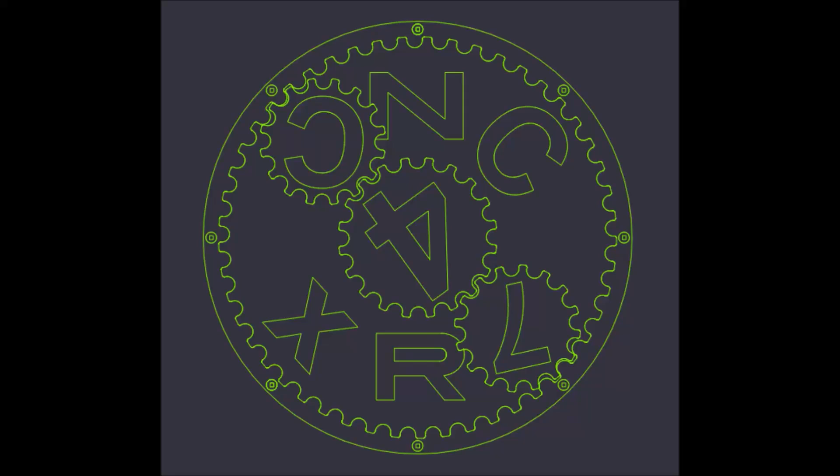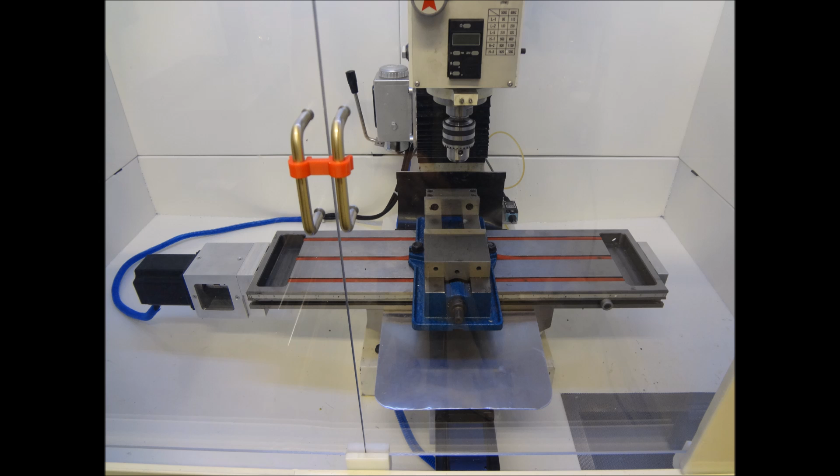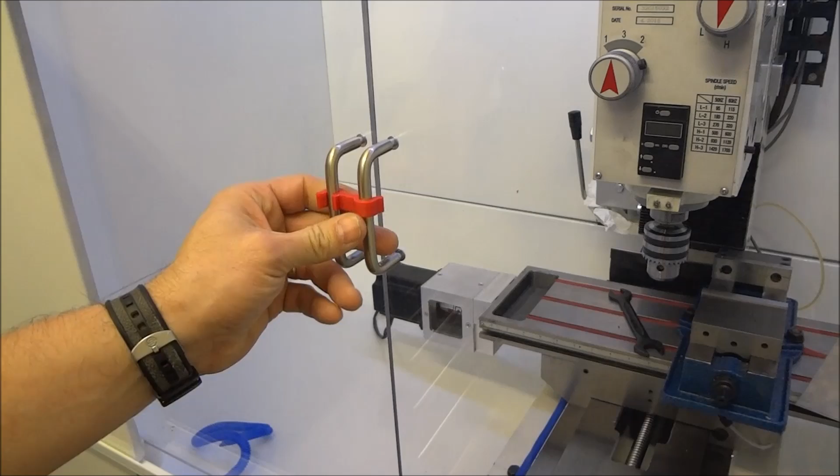In the last video we finished up the enclosure, and you may notice there's a little catch here, this little clip. I didn't know if I would need this, but the doors stay together pretty well, but I thought, why not go ahead and make a little catch just in case there's some vibration or anything, and the doors want to kind of separate.

So I just printed out this little catch. I printed several different designs. This one is one way and the other, and then I printed one that is both ways. I'm not sure which one's going to work out the best, but pretty nice.

They just kind of pop on, and then I can just open the door up, I don't have to worry about them. If I'm running a part, I don't have to worry about the doors wanting to pop open. I can just clip it like so, and that'll keep the door shut.

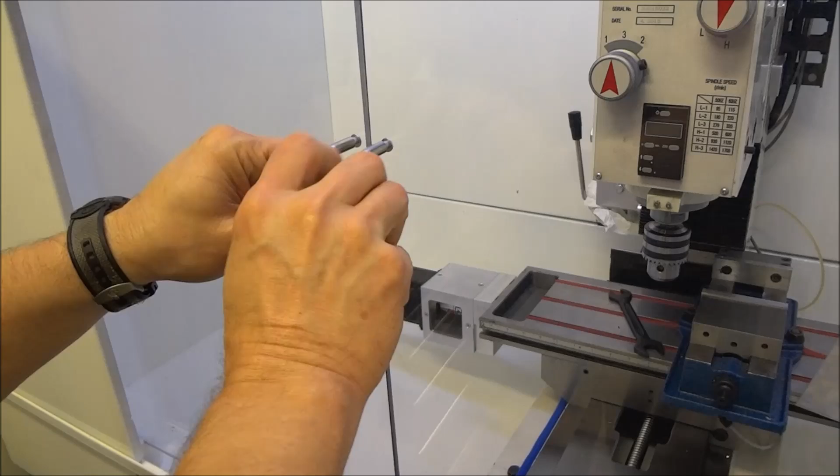3D printers are proving to come out pretty handy for a lot of different things. This just happens to be one. Now this is a pretty interesting little piece, and I learned a lot printing this out. So I'd like to share some of the stuff that I've learned with just printing out something as simple as a little clip. So let's take a look.

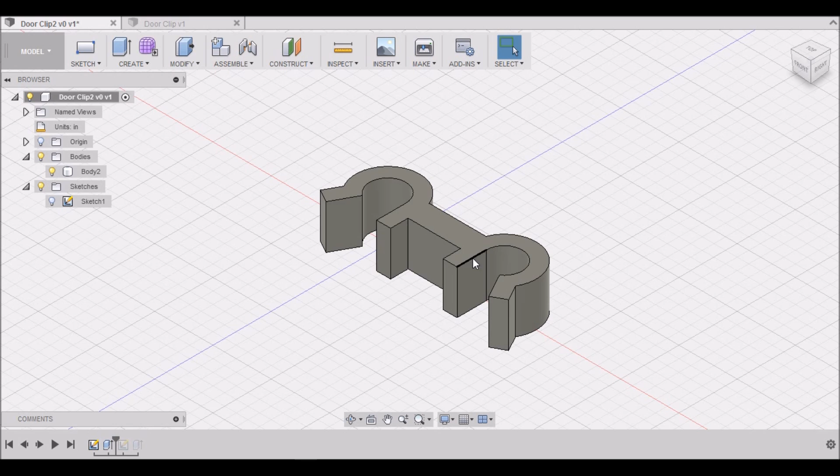Alright, well here we are in Fusion 360, and what I wanted to show you is just how to go about drawing up the clip. Now this is the clip, my last design, and originally I had modeled the clip so that it clipped in both directions. I think that this one's probably the one I'll use, it seems to work best.

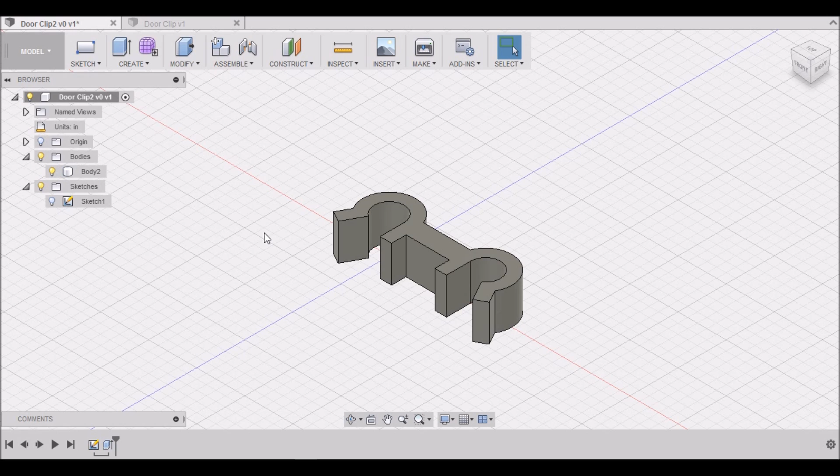As you can see, there's only a couple of different features here in the timeline. It's very simple to do. So let me show you how I went about modeling this clip. First, let me turn this stuff off, and we'll start another sketch right here. So first we want to create a sketch, I'm going to select this bottom plane here.

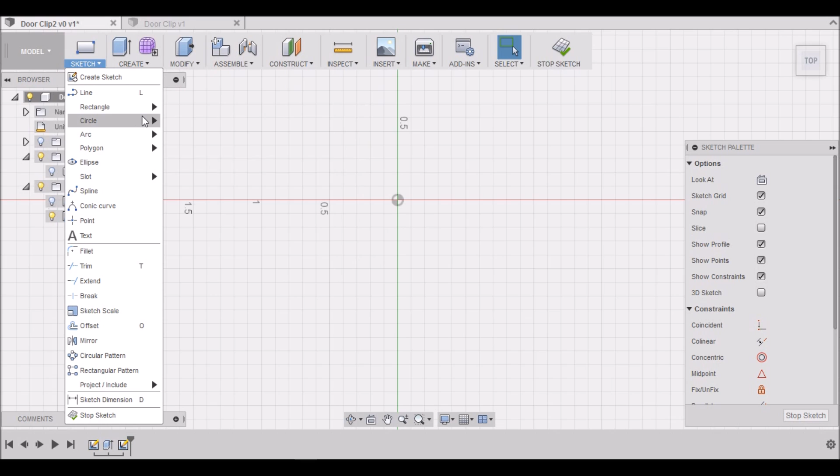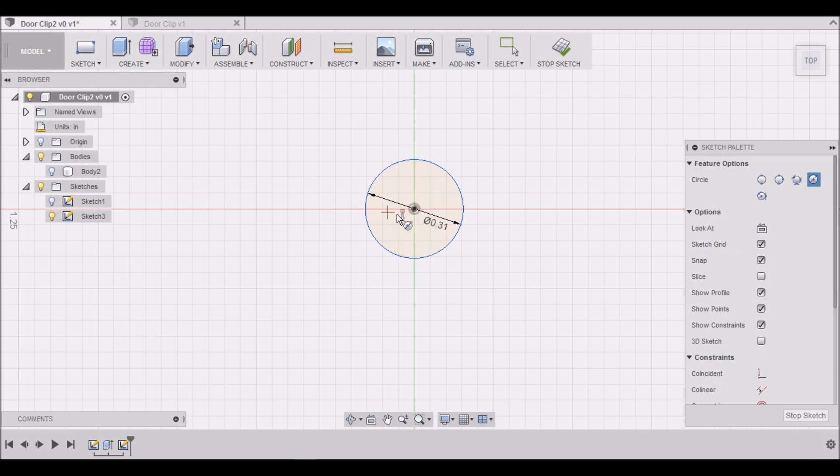Then I want to go to Sketch, Circle, and my handles happen to be about 0.31 diameter. So I'll draw my first hole at 0.31. Then I'll hit C once again to get circle, and we'll make it 0.6, about double the size.

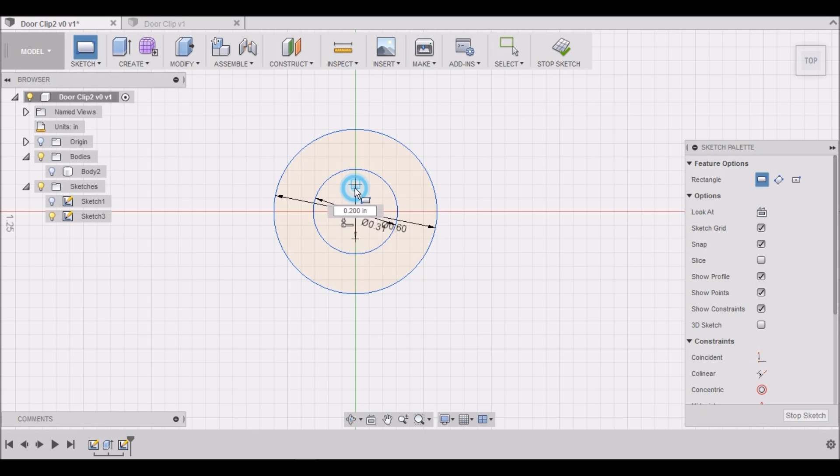There we go. Next we want to go to Sketch, Rectangle. And we'll go in this bottom box here, up to this one, and then drag it over a half inch. Reason being is the distance between my two handles, center on center, is 1 inch. So we're going to make this a half inch.

Next we're going to go 2-point rectangle. I'm going to select here, drag it down to here. I'm going to hit tab. I'm going to make this 0.188.

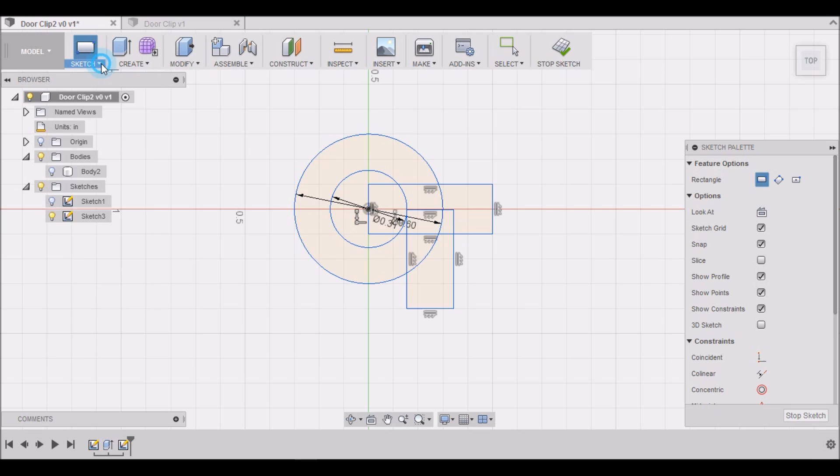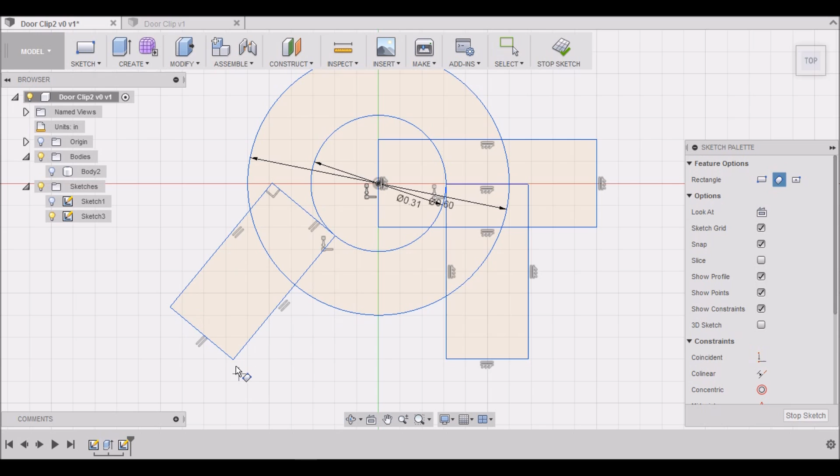Then we need to go to Sketch, Rectangle, 3-point rectangle. I'm going to grab right here on this circle and line to right here, we're going to type in 0.188. 0.188, click, and then drag down to about here so that it's even between here and here.

That looks good. Now I'm going to hit the letter T to trim, and then I'm going to just trim up what I don't need here.

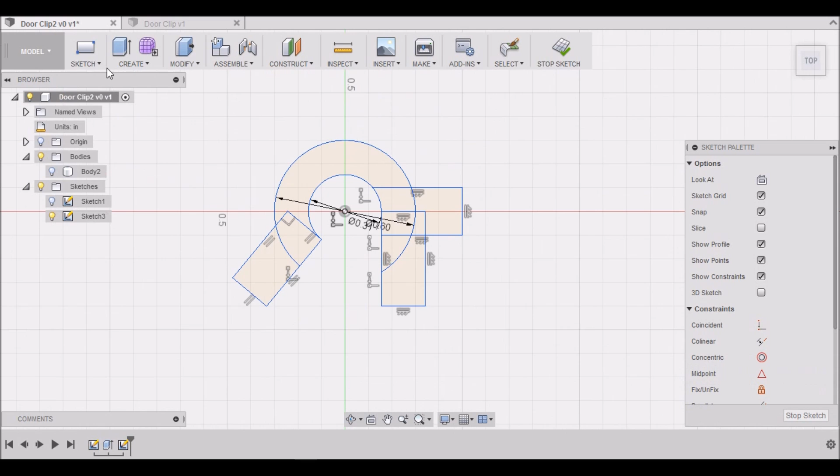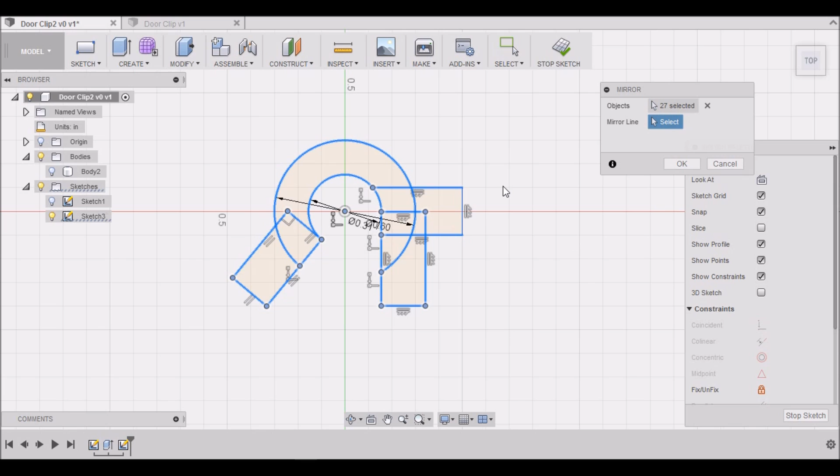Alright, I'll go to Sketch, Mirror. Left click and hold and drag across all of these. Hold Control, pick up this one and this one, and leave this one. Now I'll hit Mirror Line and then select this center line here, and it will mirror what we've already drawn.

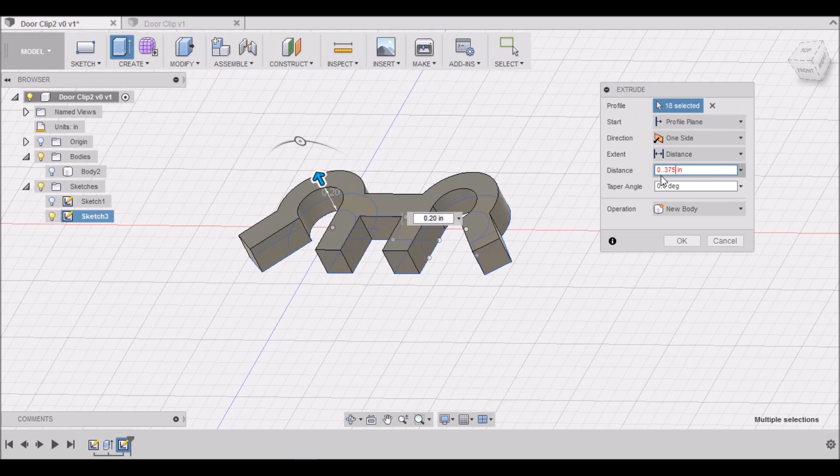Okay, left click, drag across everything to select it. Right click, press pull, and 0.375. I made mine about 3/8 of an inch tall. And there we have our clip.

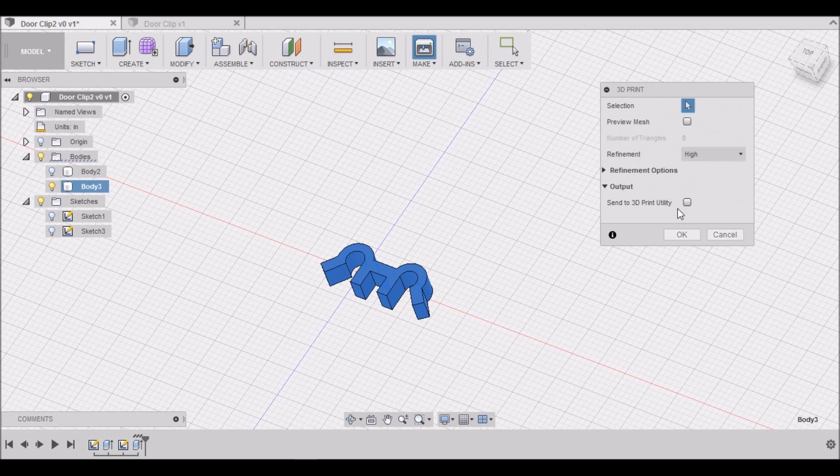Okay, now that you have your clip made, it's very simple to export this into an STL file. Go to Make, 3D Print. We want to select our model, and then make sure that Send to 3D Print utility is not checked. Click OK, and then save the file, whatever name you would like, in your favorite location, and that's all there is to it.

Now once we have our model made, we can import this into our 3D Print utility. I happen to use the one that came with the DaVinci Pro, XYZware for Pro. So let's take a look at that.

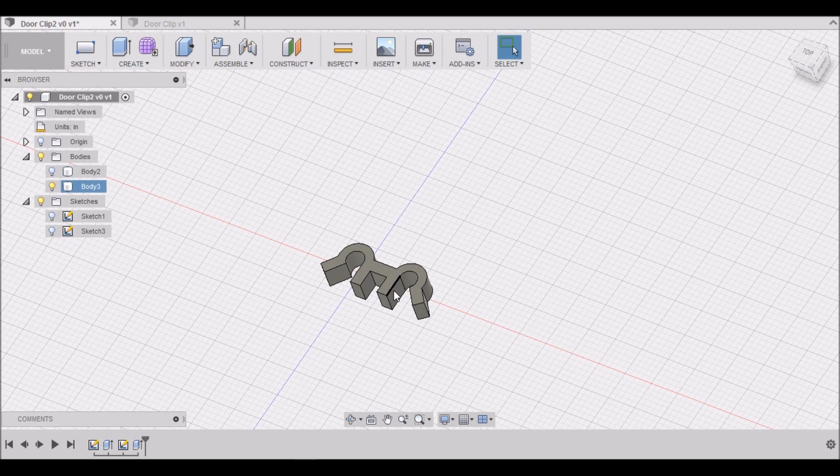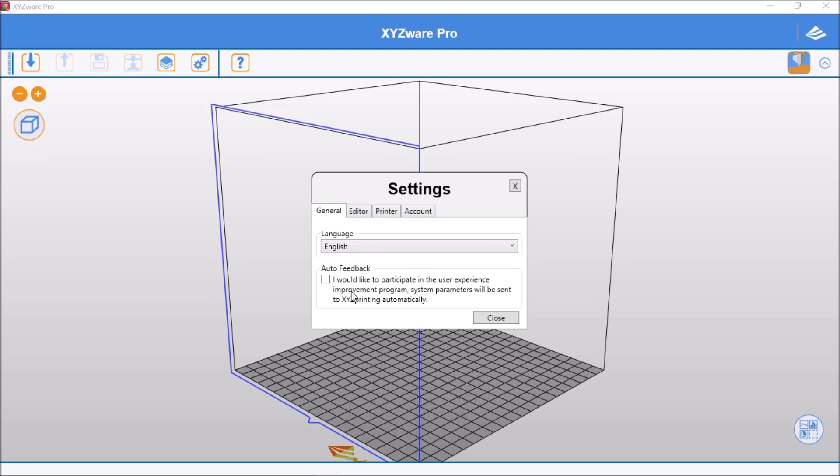Alright, so here we are in XYZware Pro, and there's really not a lot of stuff you need to do on here. We have our Settings tab, which is just general information, English, what display units you want to use, your printer. I happen to have Steel Blue inserted in the printer at the present time, and your account, that kind of information. I haven't used the object list.

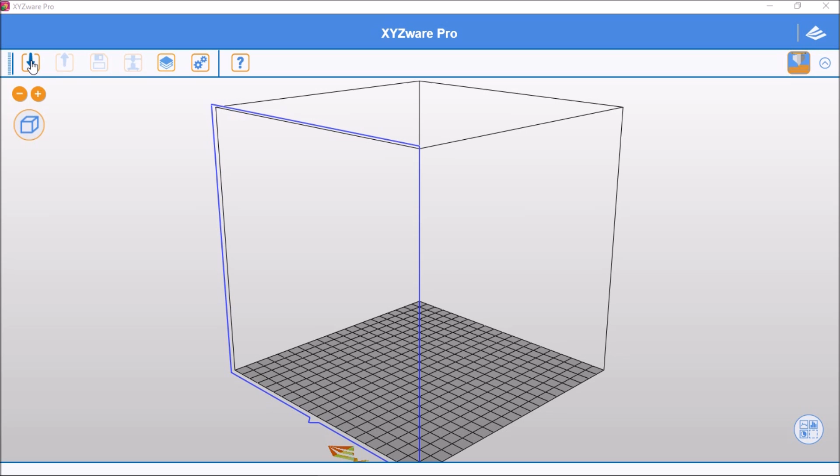This is the print button, the save button. This is the import and export button. So let's import the file we just created. We'll use our door clip.

And here it is. Now you can see that it's not oriented correctly, so we're going to select the model. Once it has this white box around it, you get these extra buttons. If I click away they go away, but once selected, you get these extra buttons to rotate it.

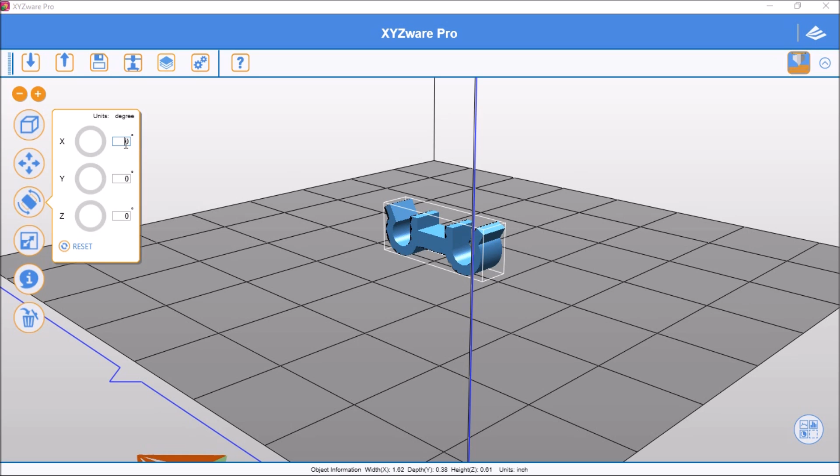Let's rotate it on the X axis 90 degrees. And then you also want to make sure that you land it so that it's up against the bottom there.

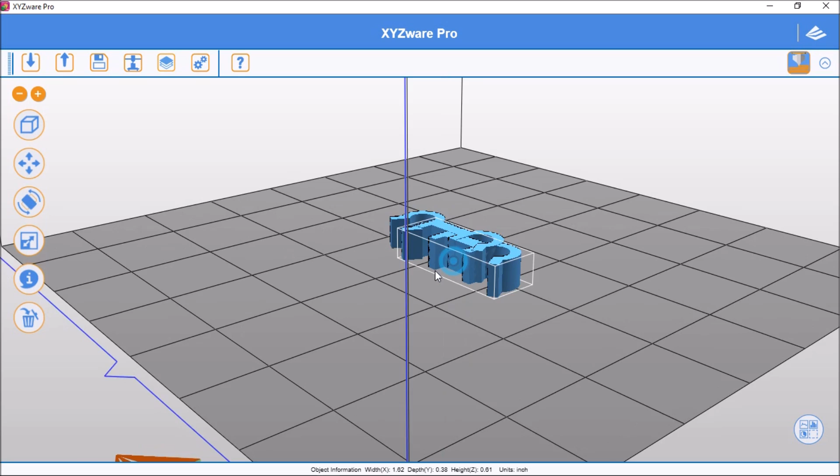Pretty easy. Now you can also right click on it and clone it, and after you have it cloned, you can print more than one at a time, which I like to do because these are pretty small. We can make sure that one's landed too. And there we have it, now we have two printed here.

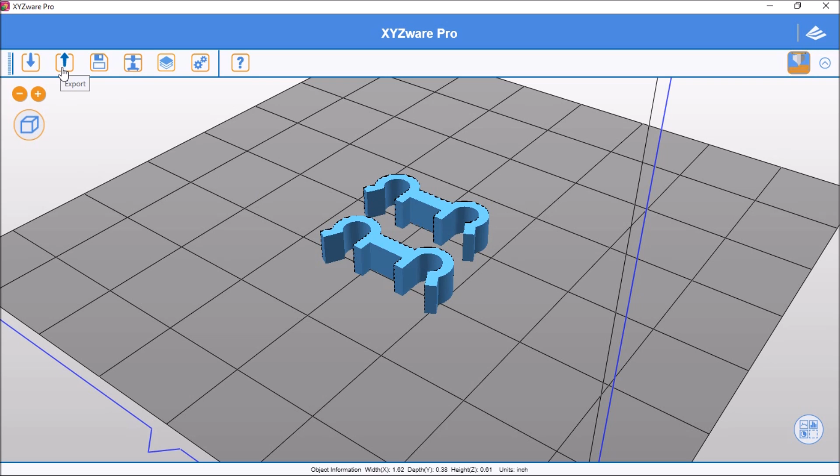Pretty simple. Now we want to export this to our printer, but before we do that, when we click this button, we get all these different settings that we can set up.

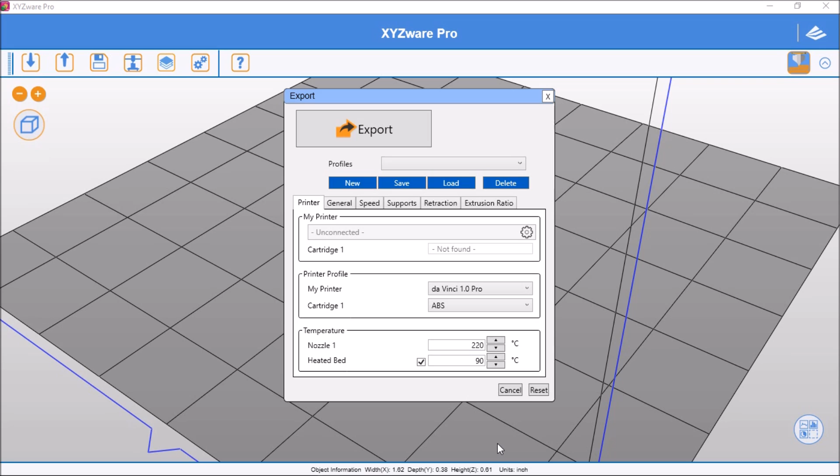So we have our nozzle temp, depending on what ABS or PLA or what you're using. I happen to be using ABS, it's stronger, and the particular ABS I'm using likes 220 degrees. Seems to work well.

The layer height, I'm using 0.3, or 300 microns. Layer thickness, shell thickness - this is where I had my issues with the first print.

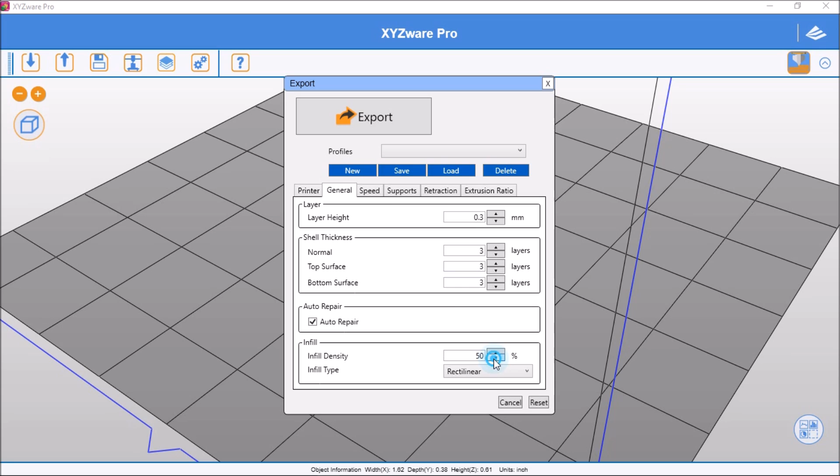Let me just kind of show you. I had it originally set for 3. I had my infill density set for 50%. Speed 30 millimeters per second. No supports needed for this.

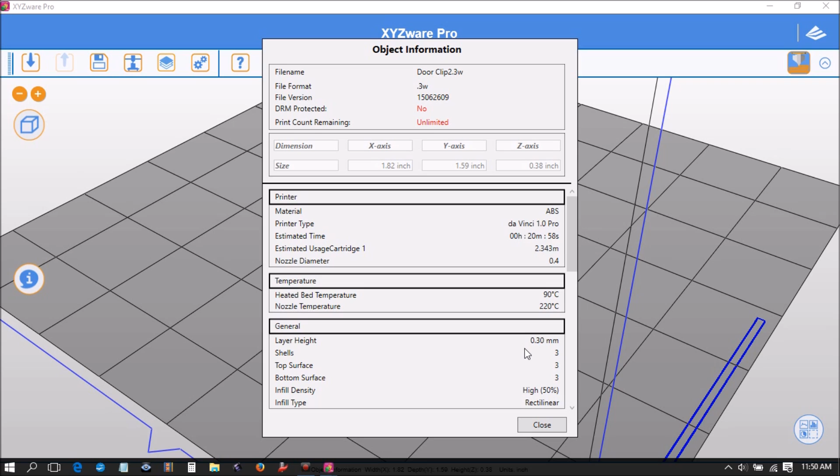Now when I export this, it tells you - now that it's exported, it pops up this information screen. It tells you it's going to use 2.343 meters of filament, going to take 21 minutes to print. It gives you all the information you put in, so you can kind of double check it.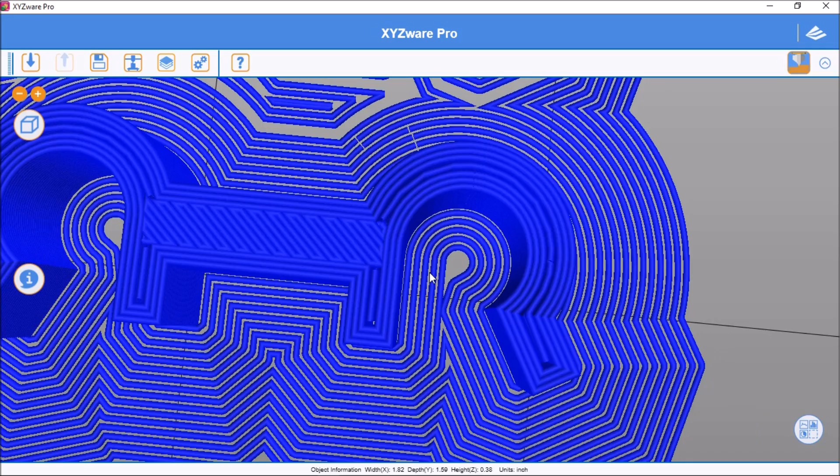Now you can see that it put the brim around here, which is great - that keeps it secured. But what I want you to notice is these lines here are your shell, and I set the shell thickness to 3 layers, so it went 1, 2, 3 on each side, which is fine for this straight section. But in this curve, because we did that, it was only able to put one more line in there for our infill, and that's where the problem was created.

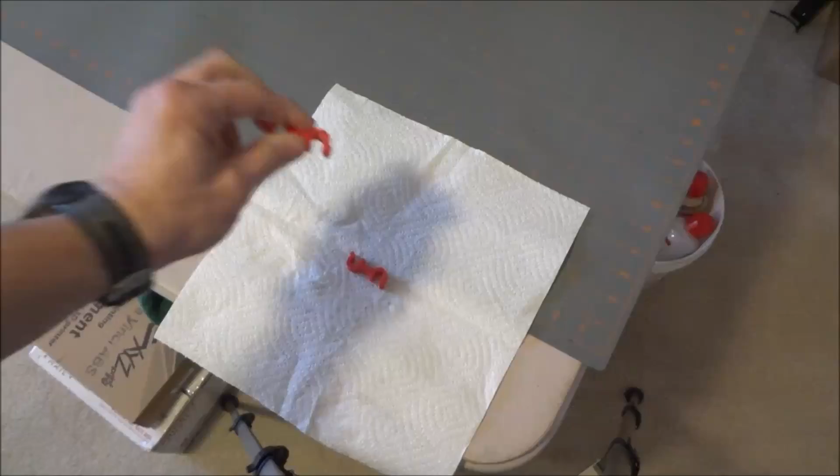Let me show you why. You can see here, when the shell thickness is set to 3, that it separates when I bend it, and it's very flexible. But when I set the shell thickness to 1, it gets more infill in there. This is very stiff and very strong, and it works out a lot better. Thought that was pretty interesting, so I thought I'd share that.

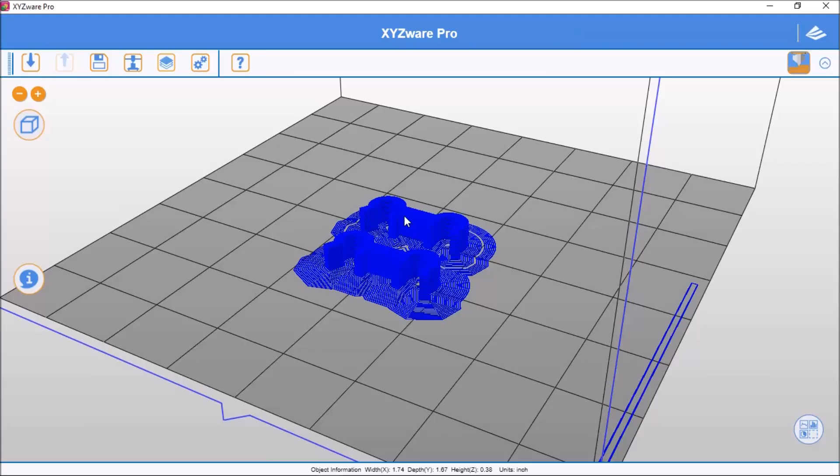Now you can see that the shell thickness is only 1 layer, and the rest of this is infill, and that makes for a stronger, more durable piece.

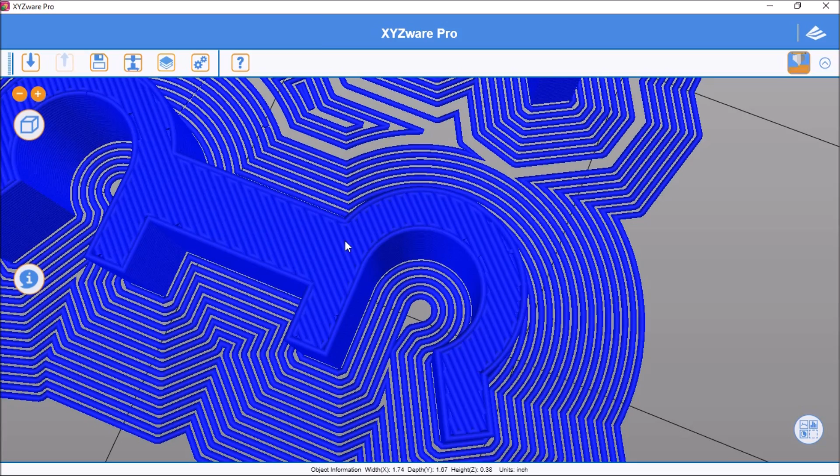So it was simple enough to print on the 3D printer. If any of you guys are building an enclosure and you have a similar setup and you'd like one of these clips, shoot me an email. It shouldn't be a problem to get one of these printed out for you.